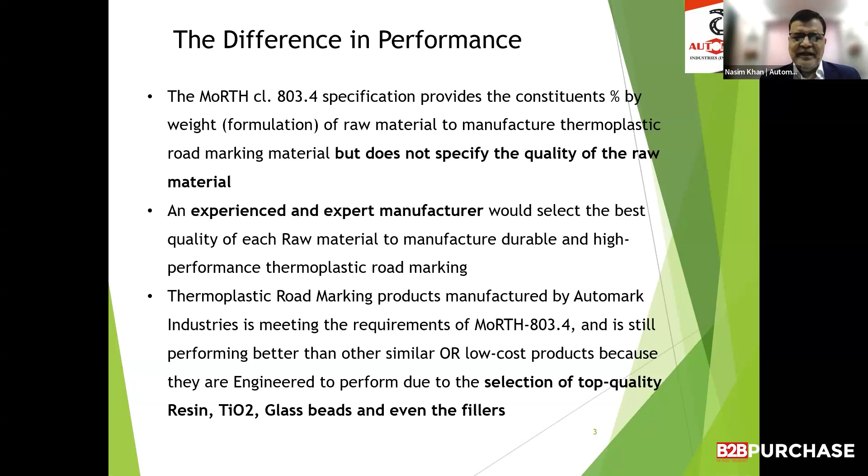That's why when we travel on the road as users, we are not happy with the road markings. So, coming to the key ingredients for performance of thermoplastic road marking: titanium dioxide is a major thing, used as a pigment for whiteness. It is the only pigment which has UV resistance and sustainable whiteness for the long term. But there are grades like the rutile grade and anatase grade.

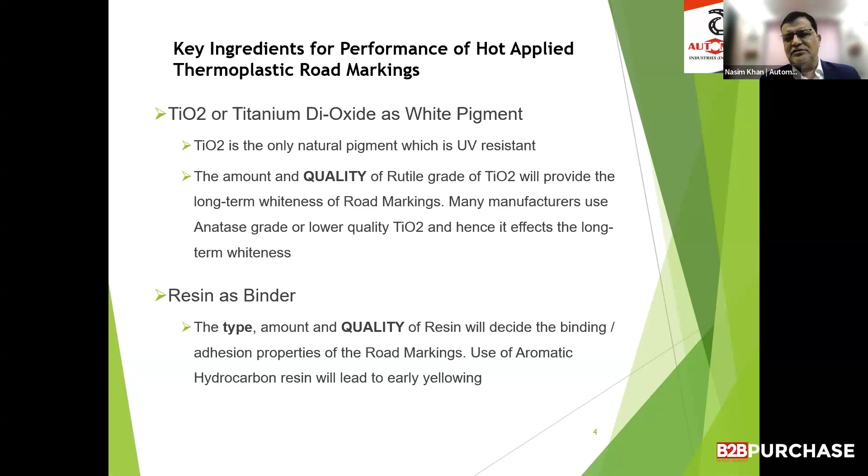But anatase grade titanium dioxide is a little yellowish, and hence does not give you long-term whiteness. Similarly, for resin as a binder, MoRTH says 18% resin should be there, but does not mention whether it should be aliphatic hydrocarbon resin or aromatic resin. So people usually go for lower grades available in the market. Lots of Chinese resins are coming into India because there is no specification check for the raw material.

And then intermixed glass beads, which should be as per 6088A, British standard. But the glass beads that are coming to India are not meeting the roundness specification, the free flow properties, and even the refractive index. So it does not match, but it is being used because once it is used inside the manufacturing process, there is no way to check after it is laid

down on the road. So people are doing that, and the initial reflectivity comes with the drop-on glass beads, which is only 250 grams per square meter of the marking, which is around 5 to 6% of the total available road marking material on the road. So people get away with showing the reflectivity for initial road marking, which in the specification also is very weak. Specification says the road marking should be reflective.

The initial reflectivity within 7 days should be so and so, and after 2 years it should be so and so. It does not say after 6 months it should be how much. It does not say at 1 year and 18 months it should be how much. So there is a lot of playing ground available because the specification itself is very weak.

Even in aggregates and fillers, if you see, Automark uses quartz. Quartz on the Mohs hardness scale is the hardest material. Quartz hardness is 7, and people are using normal calcium carbonate or dolomite, and other minerals which are very soft minerals, on a hardness scale around 3. So of course, then they will not be durable. When you use cheaper raw materials, it will not be durable.

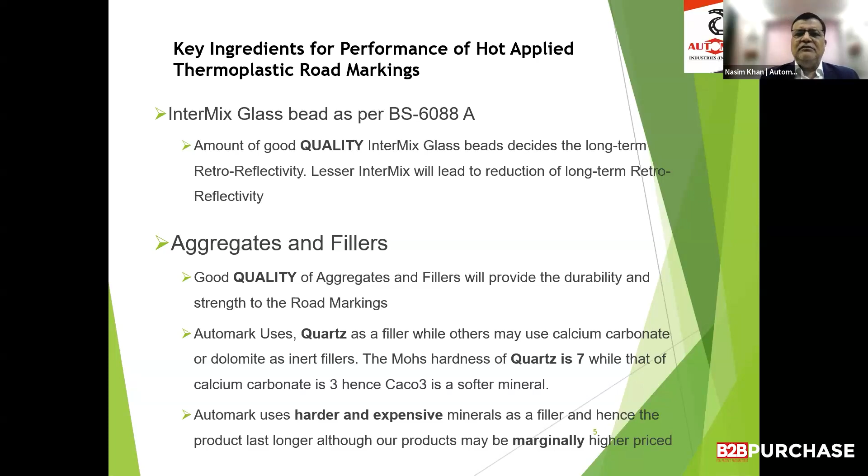Similarly, there should also be testing of raw materials. The capacity of the manufacturer should be such that he should be able to test the raw materials in his own lab. So they should have a NABL approved lab for testing of raw materials, and calibrated equipment should be available inside the factory itself to check the finished product as well as the raw materials.

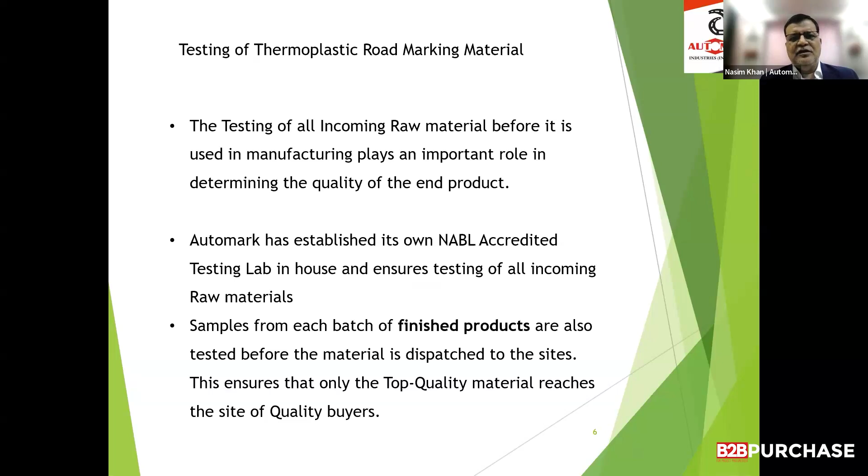This drop-on glass bead goes away within 3 to 6 months, depending on the density of the traffic. With lower traffic, it will last for at least 4 to 6 months, and with very high traffic, it will last for 1 or 2 months. So it will drop very fast from 350 millicandelas per lux, to 100 millicandelas within 3 to

4 months time. But the intermixed glass beads will slowly start popping up, and after 4 to 5 months they will start reflecting, and then it will rise. It will give more reflectivity to the road marking as the traffic flows on it, and slowly the reflectivity will drop down. Now this is not known by a lot of people.

The buyers, the road contractors, don't know much in detail about road marking, and people are asking for price, and whoever gives a lower price gets the order, and such road marking is executed. Once the road marking fails on the road, the contractor blames the vendor, saying that you have not given good road marking. He will change the vendor. Then again, the vendor will fail, because he's not getting the rate. The contractor is giving only 50% of the cost of the road marking, and hence it will not perform.

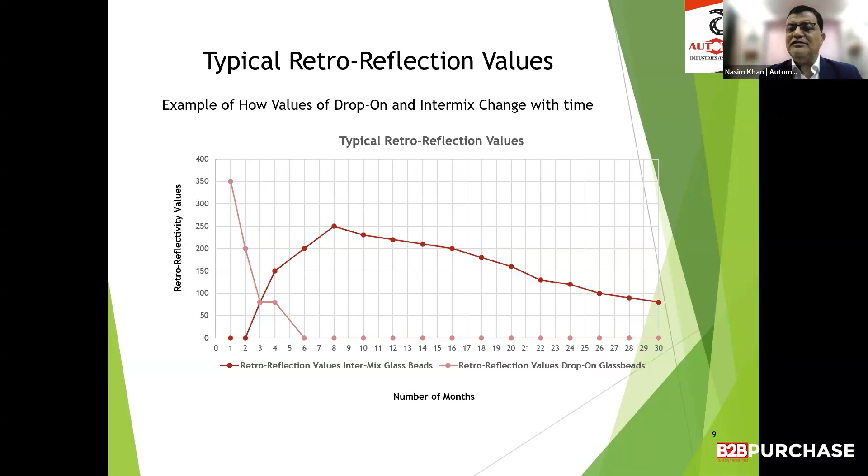So he is not aware why it is not performing, but what he thinks is the manufacturer has not given a good material. Similarly, the contractor has to understand where I'm failing. I've changed already four vendors, and still the road marking has not performed. So there should be some introspection to understand where we are not selecting the correct manufacturer.

So the visible difference, if you see, what Automark has done is Automark partners with a TOT operator called Cube Highways, which is one of the largest TOT operators, and Cube Highways together with Automark got into the details of road marking, and tried to understand why road markings are not performing well, and along with us they came up with a thermoplastic road marking material meeting the specification, not only meeting but surpassing the specification, and they paid us the cost.

Cube Highways paid us the cost and a little profit, and we have given them road marking material which they are so happy with, that it is performing for 3 years. For up to 2.5 years, it is reflecting on the road and performing very well. And everybody, NHAI authority, NHAI RO, the chairman, when they visited the Cube Highways roadside, they asked how old this road marking is. They said this road marking is 2.5 years old. We can't believe this. It looks like new.

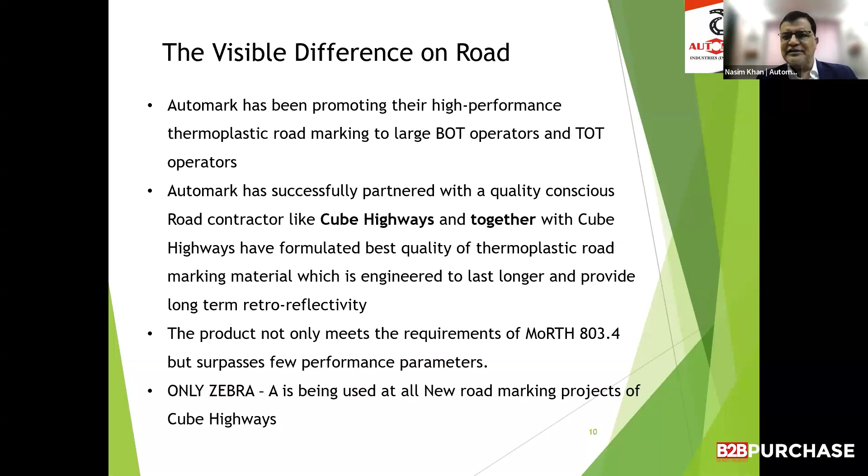So why? Because they investigated the reasons of failure, and along with us, they developed a long-lasting road marking material. So these are a few of the projects of Cube Highways that we are doing. We are doing 17 projects for them.

What has happened is because there is no entry barrier in thermoplastic road marking material, many small manufacturers have mushroomed and they don't have a face, they don't have a brand, they don't have anything to lose. Sometimes the road contractor will give them a good price. Even after a good price, either they don't know about the raw materials, they only see the specification, mix it and give it, and they don't give sustainable road marking materials. So I think know-how and experience of the road marking material manufacturing process is important.

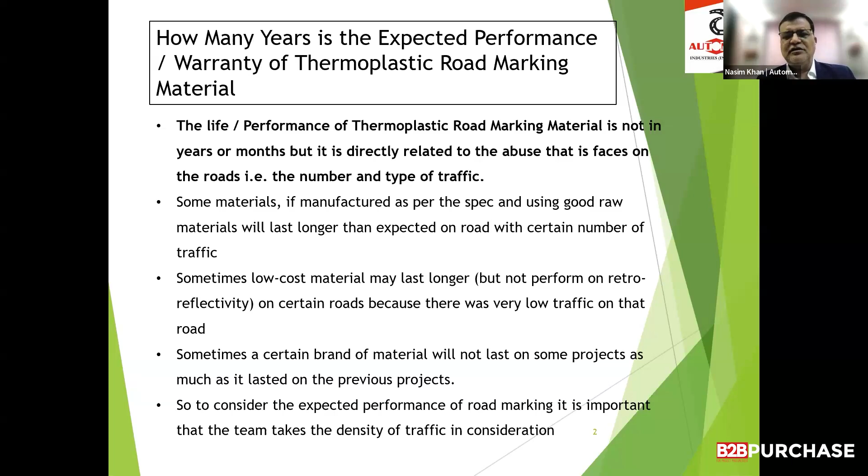And the fourth is housekeeping. Housekeeping means on the road where you are going to apply road marking, it should be ensured that no construction activity will be done after the road marking is laid down. If you do construction activities like soil compaction on the shoulder, or construct metal beam crash barriers after the road marking is done, your road marking will get damaged and spoiled early. So these four points are very important: the material itself, the manufacturing process, the application process, and housekeeping.